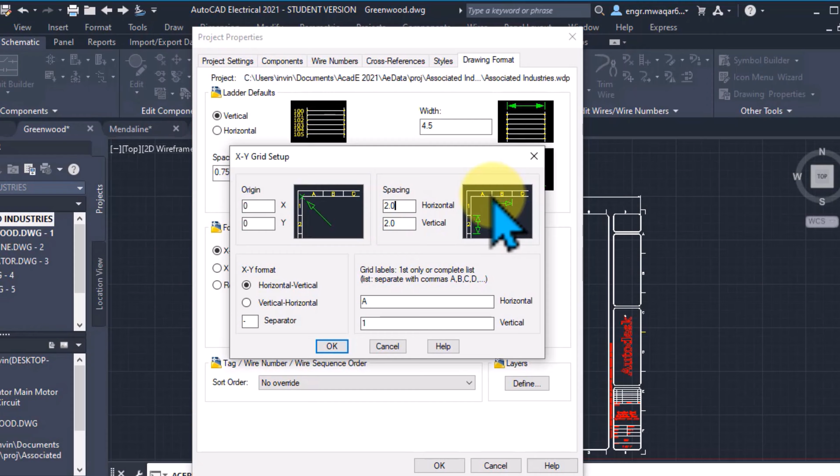It really is. Like if you need to tell someone how to find you, the absolute best you can do is point and say, hey, meet me at the gray house next to the other gray house, like 3 doors down from the gray house on the corner. Which means, practically speaking, you just cease to exist on the map. I mean, you are entirely unfindable. Unfindable, yes. And that nightmare scenario isn't science fiction. It is a very real, everyday possibility in the world of industrial design.

Oh, absolutely. Because that feeling of being totally lost in an endless sea of identical pathways, that is exactly what you get when you look at a really complex electrical schematic that lacks a rigorous automated numbering system. Yeah, because drawing a bunch of lines that connect a bunch of symbols, well, that doesn't give you a blueprint. No. It gives you a bowl of digital spaghetti. Right. It remains pure geometry on a screen, like just lines and arcs. Exactly. It has no internal logic, no syntax, and zero real-world utility for the actual technician who eventually has to wire the physical machine. Right.

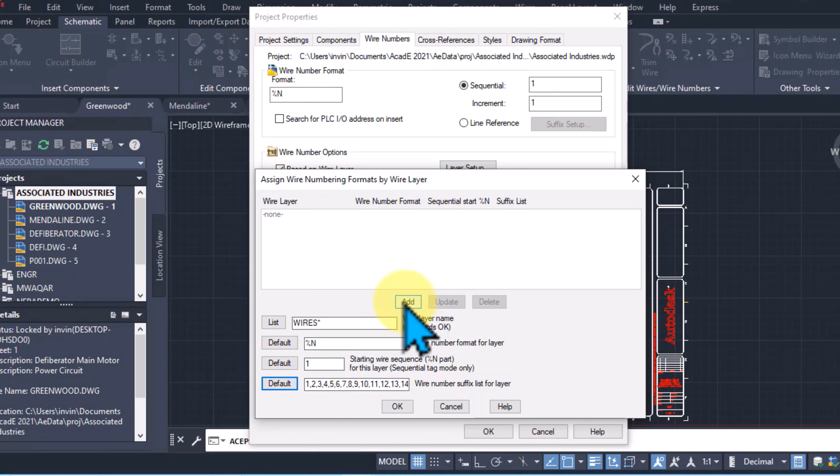And that transition from meaningless geometry to a highly structured, intelligent system, that is the entire focus of our deep dive today. Yeah, and we've got some really interesting material for this one. We do. We are pulling apart a very specific, highly technical set of sources. We have the transcripts from 5 incredibly granular YouTube tutorial videos. These are produced by Suntech Engineering Solutions. Right, and specifically, these cover sections A through E of their curriculum on wire numbering within AutoCAD Electrical.

Listening to this, maybe on your commute or while cooking dinner, you might be wondering, why on earth are we dissecting AutoCAD tutorial transcripts? It sounds a bit dry on the surface. Right, but we aren't here to read a software manual to you. We're not going to tell you which drop-down menus to click. No, definitely not. Our mission here is to extract the underlying philosophy from these sources, because we are looking at systems thinking, the mechanics of data automation and, honestly, the psychology of error troubleshooting. Yeah. The software here is merely the vehicle.

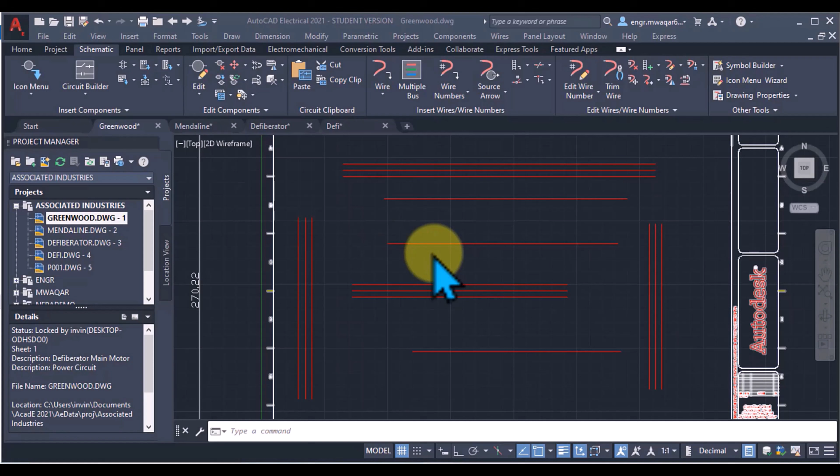What these tutorials reveal, and often they do it inadvertently as they walk through these technical keystrokes, is really a masterclass in how establishing incredibly rigid rules at the micro level is crucial. Like at the scale of a single copper wire. Exactly. Because controlling that micro level is the only defense you have against just catastrophic failure at the macro level of a massive engineering project. So before we can start naming the avenues in our hypothetical gray city, we have to understand what kinds of street signs we're even legally allowed to print. Right. What are the rules of the road?

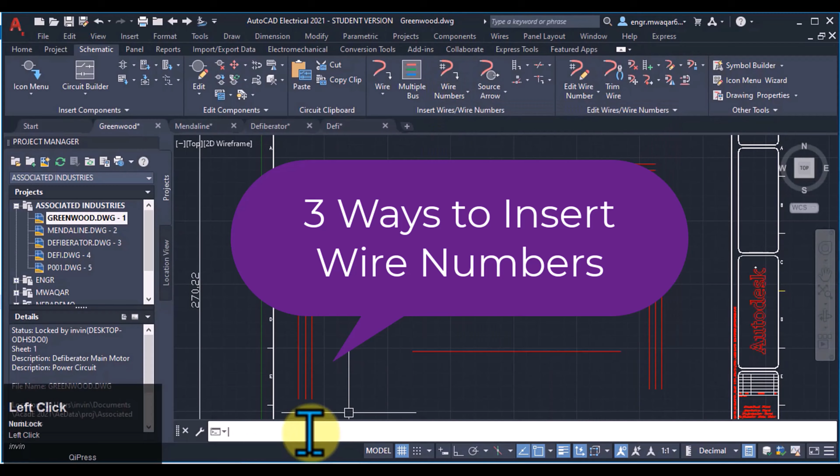Exactly. The system gives us a very specific taxonomy of tools. So the Suntech sources kick off by defining 4 primary types of wire numbers you can deploy. They are normal, fixed, extra, and signal or terminal based. And that right there immediately establishes a hierarchy of control. You aren't just slapping text onto a line. Yeah. You are assigning a behavioral category to that specific data point. Let's isolate those first 2, because the contrast between normal and fixed numbers really sets up the entire philosophy of this software. Which is the core tension.

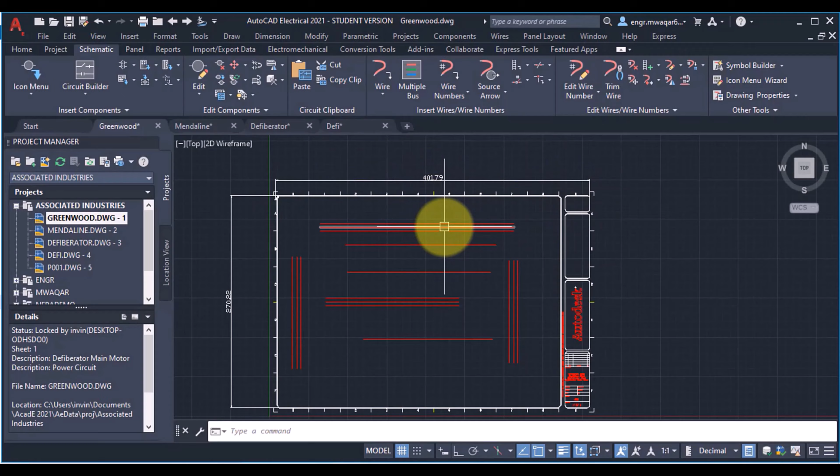Yeah. To use a physical analogy, a normal wire number acts like an incredibly smart digital sticky note. It pays attention to its surroundings. Right. So if you redesign a circuit and move that wire to a completely different part of the schematic, the normal number recalculates its position. It essentially says, oh, I'm in a new zone now. I should update my value to reflect my new reality. Yeah, it is entirely responsive to the environmental logic of the drawing. It yields its identity to the broader system.

But the fixed number, on the other hand, operates under a totally different mandate. Oh, completely. The source explicitly notes that if you insert a number as fixed, it refuses to change, no matter what the automated system tries to do to it later. It is basically the equivalent of taking a permanent marker to the digital blueprint.

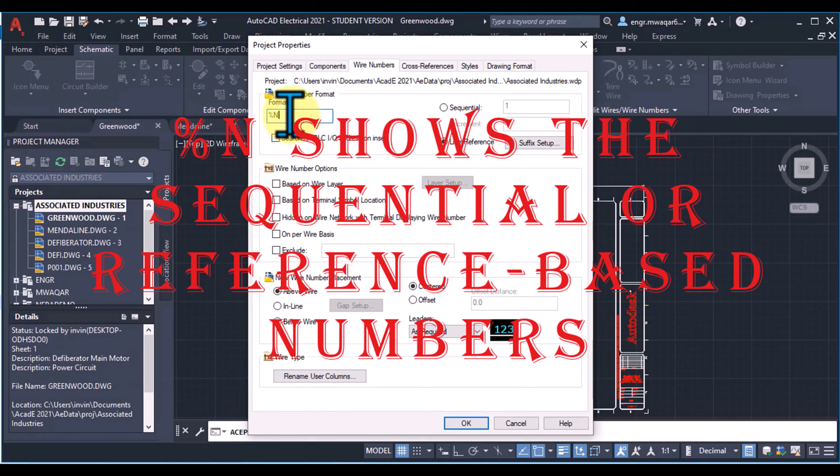Yeah. And to understand why you need that, think about the physical reality of what these schematics actually represent. Okay. You might be designing a control panel for a massive municipal water treatment plant. Right. Sure. Lots of moving parts. Thousands of dynamic changing variables. But there are also absolute constants.

Like what? Well, you might have a specific main power relay that is hard-coded into the physical architecture of the facility. It has been wire 100 for 20 years, and it will be wire 100 for the next 20 years. I see. So even if I add a dozen new circuits upstream of it, and the software's sequential counter really wants to renumber that old relay to, say, wire 112, the fixed designation just throws up a wall. Exactly. It's the manual override. It's the human engineer planting a flag and basically telling the algorithm, do not touch this.

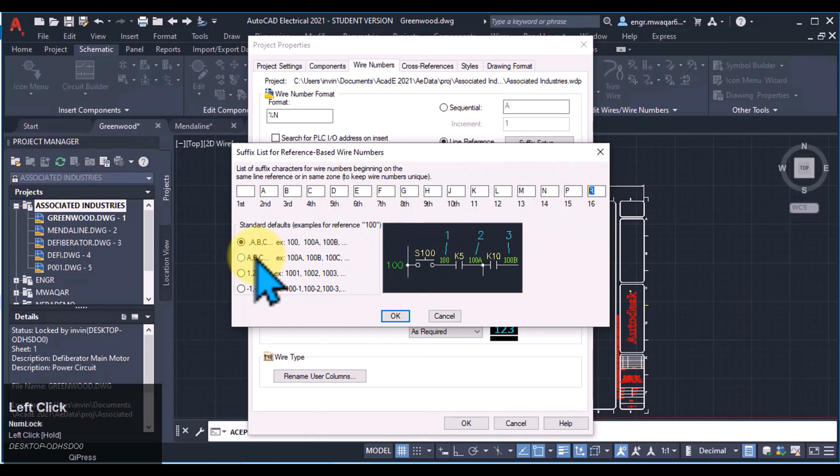And that tension between the normal dynamic automation and the fixed static anchor, that is the central tension of all complex systems. You have to decide where to yield control to the machine and where you must maintain absolute human authority. That makes total sense. Now, beyond just normal and fixed, the system gives us extra wire numbers. The sources briefly touch on these as auxiliary labels you might need for secondary referencing. Right, just handy extra tags.

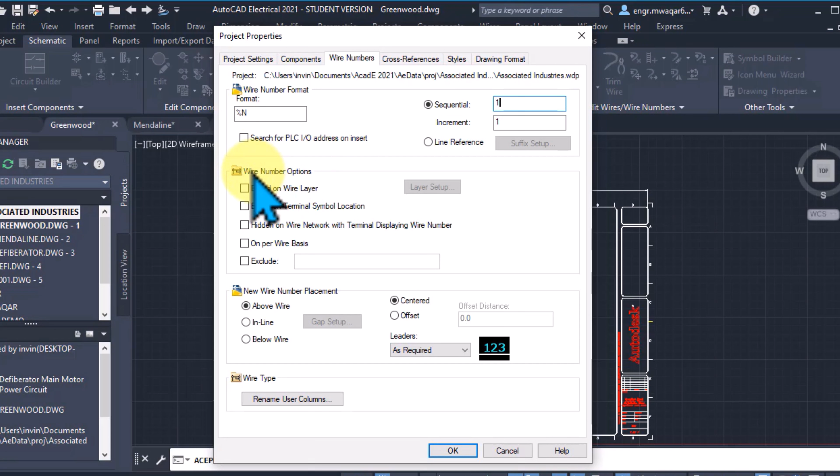Yeah. And then there's signal or terminal-based numbers, which actually tie the identity of the wire to the physical connection block it terminates at. Which is a beautiful preview of how the software tries to map the digital lines to physical hardware. We'll actually see that principle explode when we look at the insertion basis options in a minute.

But before we get there, the user has to define their processing scope. The system essentially asks, how wide of a net are we casting here? Right, the scope of the command. You can process the current drawing, you can go project-wide, or you can surgically select individual wires. So the micro, the meso, and the macro scopes of operation. Exactly. As for actually inserting these numbers, the tutorials detail the mechanics. You can use the ribbon tab UI, or you can manually type the command AEWIRENO into the prompt.

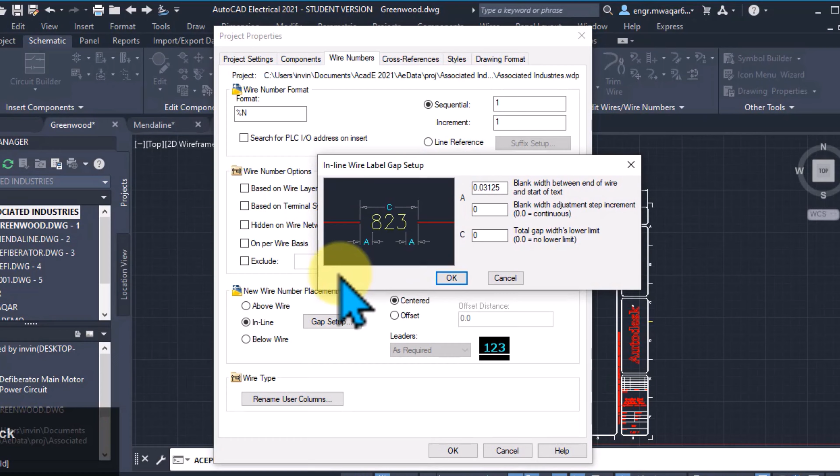But the mechanical input isn't the fascinating part. Not at all. The fascinating part is how the software knows what to name the wire. The sources list 3 main basis options for generating that identity. And this is where we really shift from the behavior of the label to the origin of the data itself. First, you can base it on local drawing properties, meaning the wire just follows whatever sequential or grid-based rules are set up for that specific document. Okay. Second, for 3-phase circuits, you can base the numbering on specific prefixes and suffixes.

Let's actually pause on the 3-phase circuits for a second. Sure. In industrial power, 3-phase electricity uses 3 alternating currents that are slightly out of phase with each other. This is to deliver continuous massive power to heavy machinery. Okay. And physically, those are 3 distinct heavy gauge cables usually designated L1, L2, and L3. If you mix those up, a massive industrial motor could literally run backward or even rip itself apart. Oh, wow. That's terrifying.

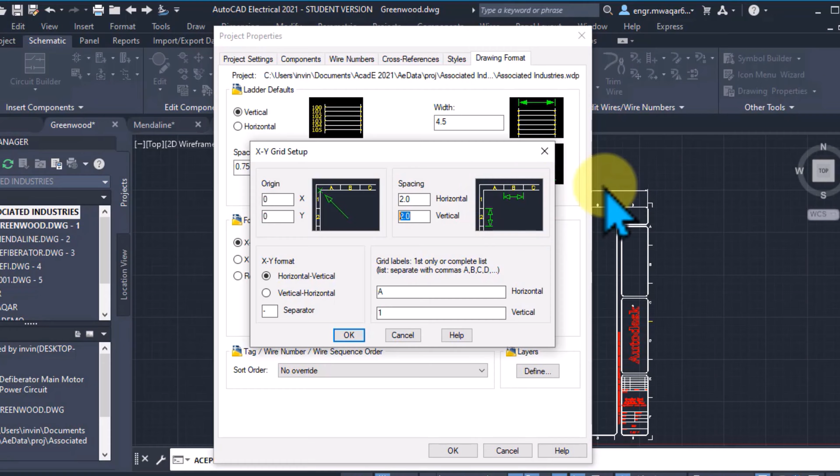So assigning a numbering basis specifically tailored to append those L1, L2, L3 suffixes automatically, well, that isn't just a neat formatting trick. No, it's a safety feature. Exactly. It is a safety-critical mapping of real-world physical phase alignment directly into the digital space. That makes the third basis option even more compelling. The source states you can base the numbering entirely on PLC I/O. Right. For anyone outside the automation space, that stands for Programmable Logic Controller Input-Output Addresses. And this is arguably the most powerful conceptual leap in the software.

I have to admit, I found myself struggling with this one initially. Really? How come? Well, if a copper wire is just a copper wire, why does it matter if it happens to connect to a PLC? Like, why does it need an entirely distinct algorithmic category for its numbering? That's a fair question. Why not just number it sequentially like every other wire on the board?

To understand that, we really have to look at what a PLC actually is. A programmable logic controller is not just another dumb component sitting on a rail. Okay. It is the centralized computational brain of the machine. It is the ruggedized industrial computer that reads the sensor data and makes the split-second decisions to fire a pneumatic piston or halt a conveyor belt.

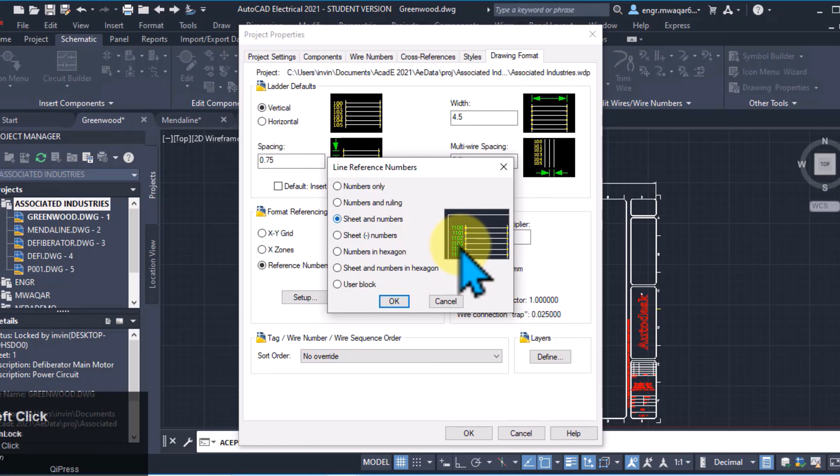So it's the nerve center. Yes, exactly. And that nerve center interacts with the world through very specific physical ports, its inputs and its outputs. Inside the computer's memory, those physical ports have hard-coded addresses. Like an IP address, sort of? Kind of, yeah. Let's say input port X17 is the physical port monitoring an emergency stop button.

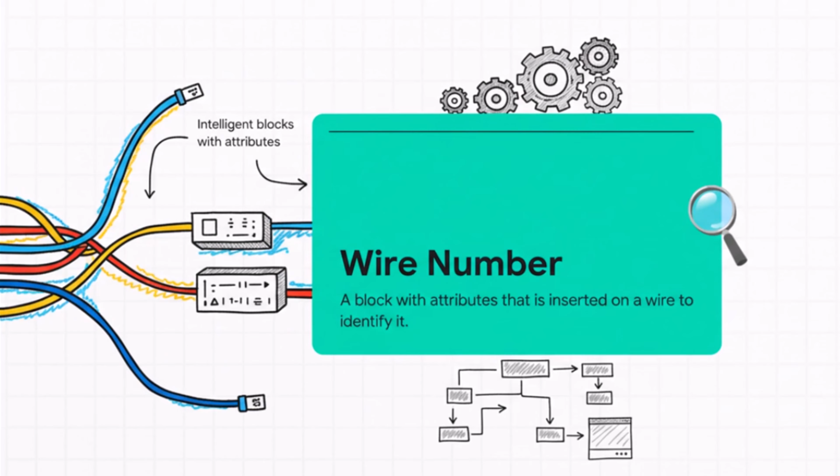Important button. Very. Now, if you just use sequential numbering and call the wire connecting to it wire 42, you force the human technician to act as a translation layer. Right. The technician looks at wire 42, has to go consult a completely separate spreadsheet to see that wire 42 maps to port X17, and then wires it up. And every time you force a human to cross-reference 2 different documents, you introduce a massive vector for error.

Exactly. But if you base the wire number on the PLC I/O address, the software intelligently scans the schematic. It traces the digital line back to the PLC symbol, reads the port name X17, and automatically forces the wire to adopt that exact name. Oh, I see. The wire fundamentally loses its independent identity as just another line, and it becomes an explicit named extension of the computer's logic.

The wire becomes a data bridge. The physical copper literally takes on the digital address of the brain it feeds. Exactly. It collapses the theoretical map and the physical hardware into a single unified language. That is brilliant. Now, if you aren't tied to a PLC and you were just using sequential counting, the rules for how the software handles incrementing are brilliantly literal.

Yeah, they really are. The tutorials point out that your sequential numbers can be numeric, alphabetic, or alphanumeric, and the system recognizes the patterns differently. If you format a wire as A101, the software recognizes the alphanumeric structure, and it increments the numeric portion for the next wire, giving you A102. Right. It parses the string, identifies the integer, and just runs the math. But if you just give it a simple letter A, the software defaults to an alphabetical sequence. The next wires become B, C, D.

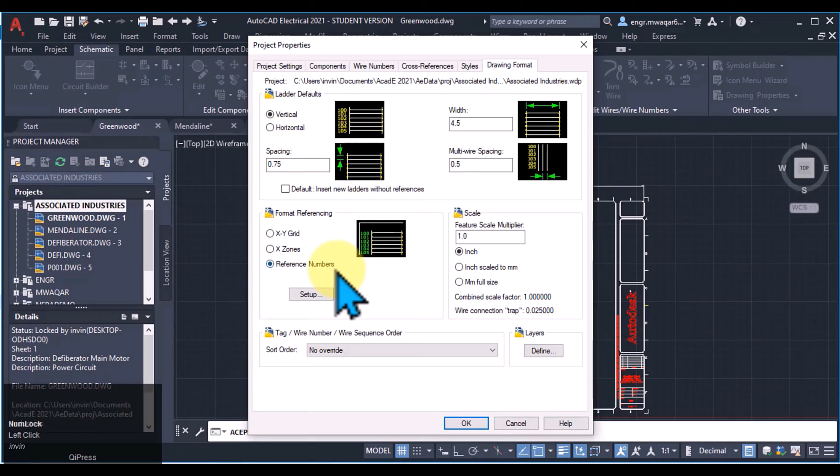Makes sense. You also have suffix setups where you can append sequences to the end of a base format. The source notes you can have suffixes of 1, 2, 3, or ABC. But what really caught my eye was the mention that you can use negative numbers as suffixes. Oh, yeah, which opens up a whole secondary layer of information encoding.

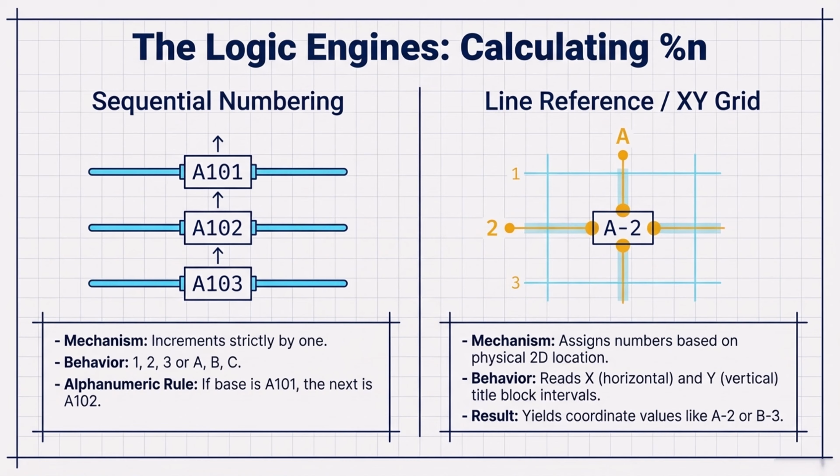How so? Well, in complex DC circuitry or systems dealing with specific signal polarities, the return path or the negative leg of a circuit is just as critical as the positive. Right. By allowing a negative suffix natively in the automated sequence, the engineer can encode the literal direction of current flow or polarity state directly into the automated naming convention.

So we have defined our toolkit. We have responsive sticky notes, stubborn permanent markers, phase-aware tags, and PLC-driven data bridges. It's a robust toolkit. It is, but having the tools is only the preliminary step. I mean, if you hand someone a dictionary, it doesn't mean they know how to write a coherent sentence. No, definitely not. We have to look at the syntax. We have to look at the rigid grammatical rules the software enforces to prevent the user from generating absolute gibberish.

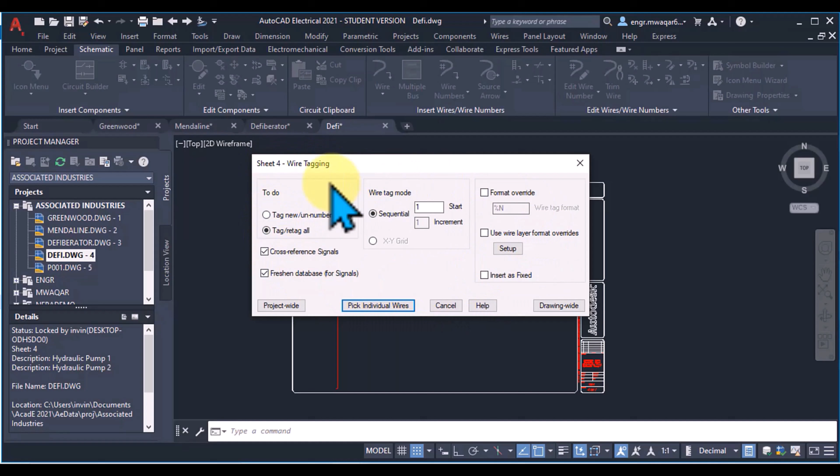And whenever a system handles automated naming across thousands of variables, the syntax is really the only thing standing between order and chaos. The sources take us deep into the project properties dialog box, specifically into the tab governing wire numbers in drawing format. Right. And there is a mandate here that the tutorials hammer home with intense focus.

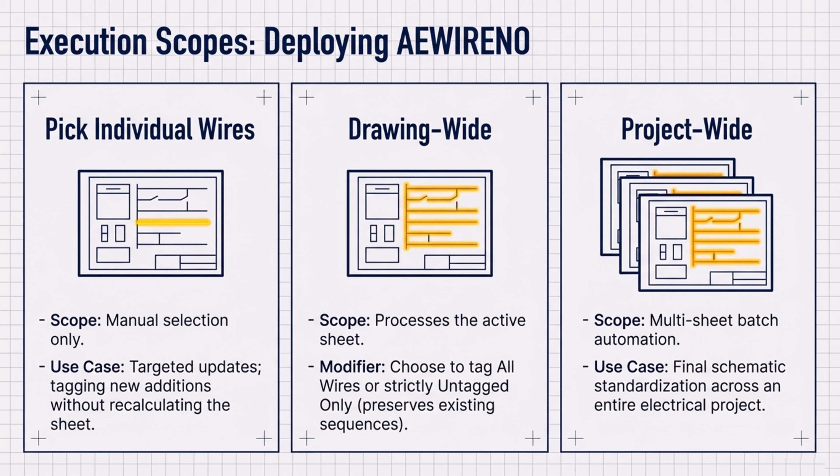The software uses the % sign to denote variables, and the source makes it unequivocally clear that the %n variable, which represents the sequential or reference-based base number, is absolutely mandatory. Yeah, you cannot skip it. It must be included in your format block. It is a hard-coded architectural requirement.

And the instructor in the video actually demonstrates this by trying to break the rule. I love when they do that. It's so helpful. They go into the format box, delete the %n, and attempt to just use the %s variable, which stands for the sheet value.

Okay. They try to apply it, and the software immediately throws up a brick wall. It generates an error message that reads, "Wire format cannot be used as is. Valid formats are %n base wire number." That is a textbook example of forcing function in software design.

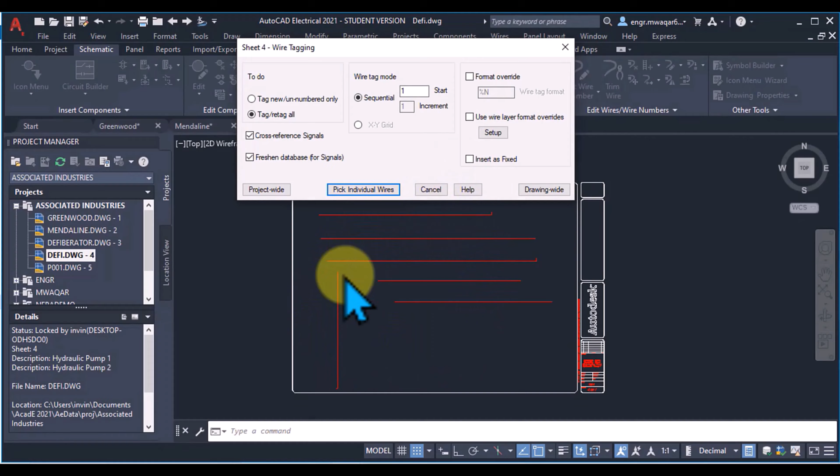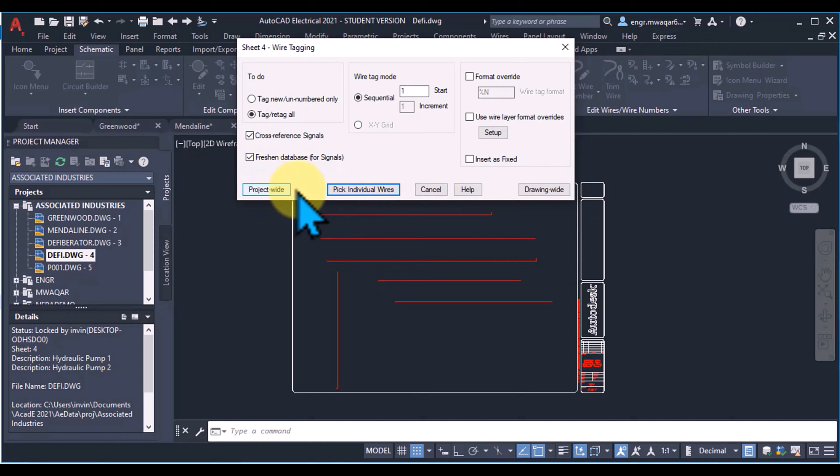The system evaluates the user's input, anticipates the inevitable downstream failure, and completely revokes the user's ability to execute the command. So let me advocate for the frustrated new user here. Go for it. If I am an engineer and I'm just trying to draft a straightforward control circuit, why do I need to learn this arcane language of %n and %s? Right. Why can't I just click on the digital line, open a text box, and manually type in wire 1? Why does the software force me to essentially write code just to name a line?

It is a very natural friction point. When you are operating on a small scale, manual entry always feels more intuitive. If you are drawing a circuit with, say, 12 wires, you can hold the state of that entire system in your working memory. Sure. You know, you just typed wire 7, so the next one has to be wire 8. The human brain can manage a dozen variables easily. Exactly. But industrial CAD software is not built for a dozen variables.

It is built to design the electrical architecture of a commercial airliner, or an automated automotive assembly line, or an offshore drilling rig. Oh, wow. Okay. In those environments, you are dealing with 50,000 unique wires spanning 400 pages of schematics, being actively edited by 30 different engineers simultaneously on a shared server. That scale is terrifying. It is. At that scale, if the software allows you to just click and type wire 1, the entire project is doomed before lunch.

How so? Well, engineer A in Detroit types wire 1 on page 14. Engineer B in Stuttgart types wire 1 on page 200. The local logic makes sense to them individually, but the global system now has a fatal collision, because there are two wire ones. Yes. And when the physical machine is being built on the factory floor, a technician might take a high-voltage power line meant for a hydraulic pump and terminate it into a sensitive, low-voltage data sensor because both lines share a manually typed duplicate identifier. And boom. Boom! The resulting short circuit could cause millions of dollars in damage. Or worse.

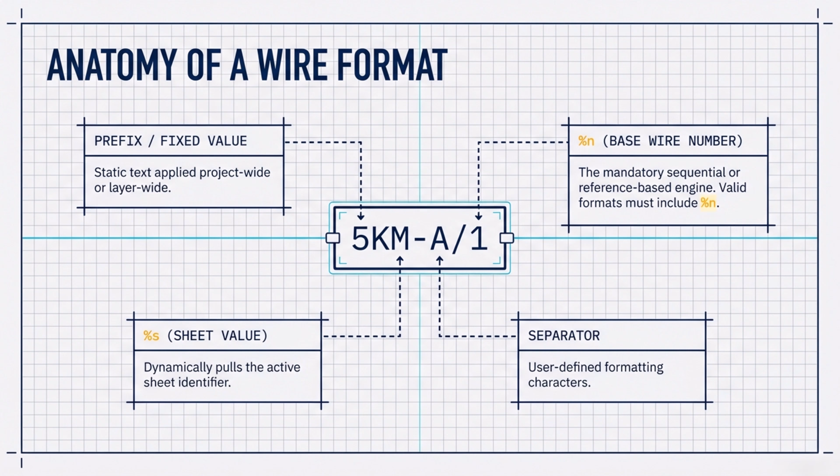So the %n variable isn't just a quirky formatting requirement. It is the heartbeat of sequential integrity. By forcing you to use %n, the software is stripping away your ability to manually track the count. Exactly. You are surrendering the counting process to a centralized, infallible database. Right. You tell the software, I don't know what the current global count is, and frankly, I shouldn't have to care. You query the database, find the next available unique integer, and inject it exactly where this %n sits in my formula. The software simply refuses to let you build a system that relies on flawed human memory.

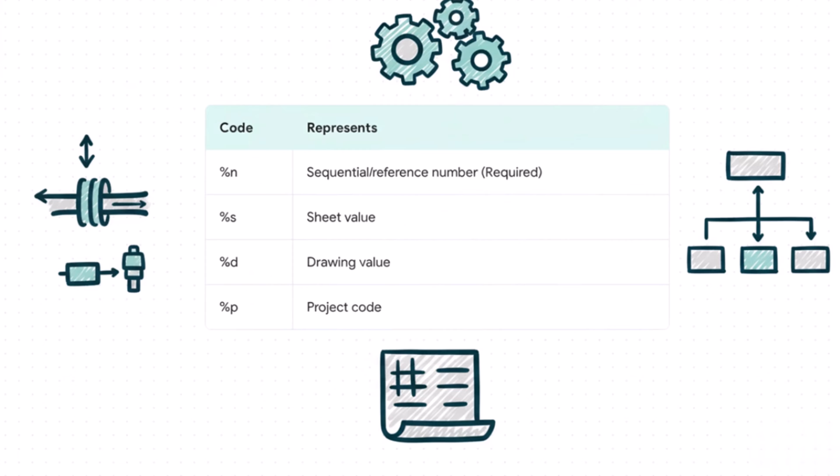That is profound. Once you accept that the %n is mandatory for survival, the sources show you the rest of the variable library you can play with. It's quite extensive. You can stack these variables to build incredibly dense packets of information. You can add the %s for the sheet value, so the wire intrinsically knows what page of the blueprint it belongs to. Which is vital. You can pull in variables for the drawing value, the overarching project code, the installation code, the specific location code within the physical plant, and even the section and subsection of the machine. You are essentially constructing a highly compressed, custom digital zip code for every single component.

And the tutorial shows how you can encapsulate all this automated data with formatting flourishes. Right, to make it readable. Exactly. You don't have to output a raw string of meaningless text. You can enclose the automated numbers inside square brackets to make them visually pop off the dense geometry of the page. You can hard code fixed prefixes and suffixes directly into the syntax around the variables. The visual parsing of this data is so important. The source gives a great specific example of this.

They set up a format that outputs wire names like 5KM1 and 5KM2. The 5KM is a fixed prefix typed by the user, and the 1 and 2 are generated by the automated %n sequence. They also show appending suffixes like PS1 and PS2. Think about the technician standing in front of a cabinet containing 3,000 identical gray wires. Right, our gray city. If every wire is just a random string of numbers, troubleshooting requires constantly looking back at a massive index. Which takes forever.

But if they see a wire labeled 5K14PS2, and they know that the 5K prefix designates the primary cooling loop, and PS designates a pressure switch, well, they instantly understand the function, origin, and destination of that wire without ever opening a manual. The syntax does the heavy lifting.

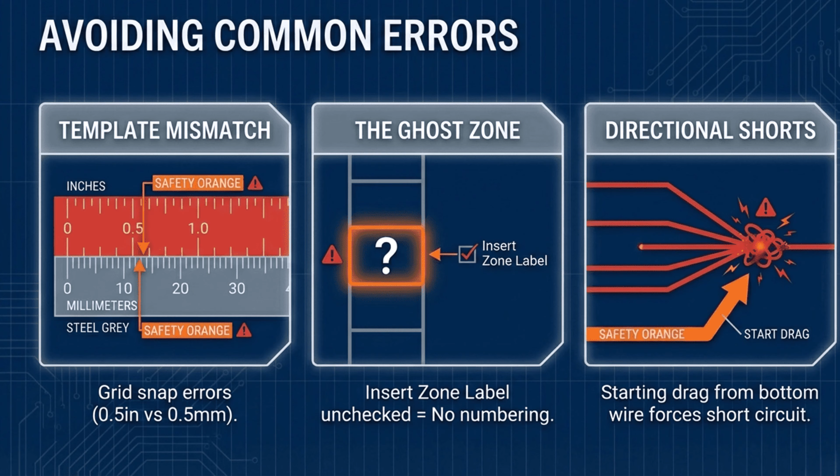The software extends this level of granular control right down to the physical placement of the text ink on the digital page. Oh, the wire layer configuration. Yes, the sources dive into that. You can instruct the system to automate the numbering based entirely on which specific default wire layer you happen to be drawing on. Which is super clever.

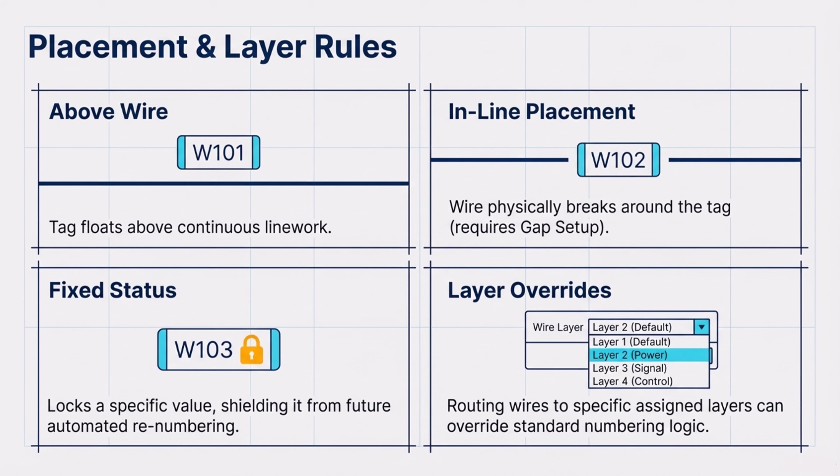And you can dictate the geometry of the text itself, right? You can tell the software, I want all wire numbers to hover exactly 2 millimeters above the wire. Or I want them placed directly in line, visually breaking the line segment. Or I want them offset by a very specific coordinate distance. Which is an absolute necessity for legibility. You can design the most brilliant, data-rich naming syntax in the world, but if the software just dumps that text directly on top of a cluster of intersection symbols, it becomes an unreadable black smudge on the printed blueprint.

Okay, so we've defined our tools. We've written our airtight %n-driven syntax. We have a perfectly formatted label that contains the sheet number, the subsystem prefix, and a unique sequential integer. Sounds perfect. But none of that matters if we don't know where to put it. Right. This brings us to the geometry of order. The software has to understand the physical space of the blank page. The theoretical data has to be mapped to geographic coordinates.

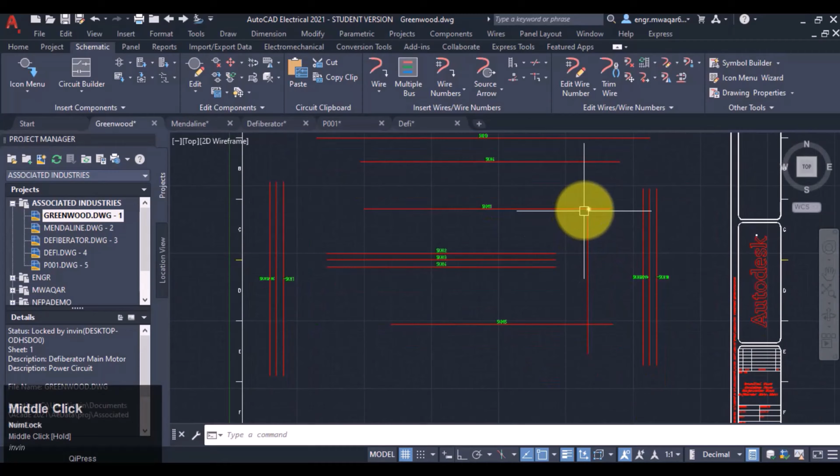Yes. The software derives its numbering logic directly from the physical geometry of the drawing page. And it all revolves around the concept of the title block. Right. We all know how standard engineering title blocks work. They frame the drawing with a grid. You typically have horizontal axes along the top and bottom with numerals, say 1 through 10, and vertical axes along the sides with alphabetic characters, A through F.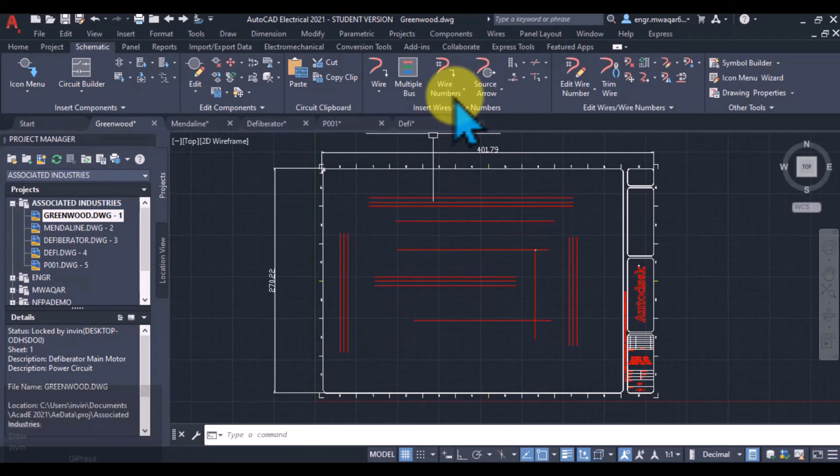But the crucial realization here is that AutoCAD does not intrinsically possess visual intelligence. It doesn't see the letters and numbers drawn in the margins of your template. To the software, those are just dumb, dead pixels. You have to mathematically map those axes for the software. You have to calibrate the engine. And the deep dive into the math required to do this is genuinely fascinating. Walk us through it.

So the source walks through the exact calculation. The instructor says, look at your horizontal x-axis, count the total number of sections. If your grid starts at 0 and goes to 9, you have 10 discrete sections. Okay, a simple integer count. But then you have to find the total physical absolute distance of that entire axis within the digital coordinate system. Right. You measure from the 0 line all the way to the 9 line. And you take that overall distance and divide it by your 10 sections. The instructor does this live on screen, and the calculation outputs a very specific, highly granular value, 40.179.

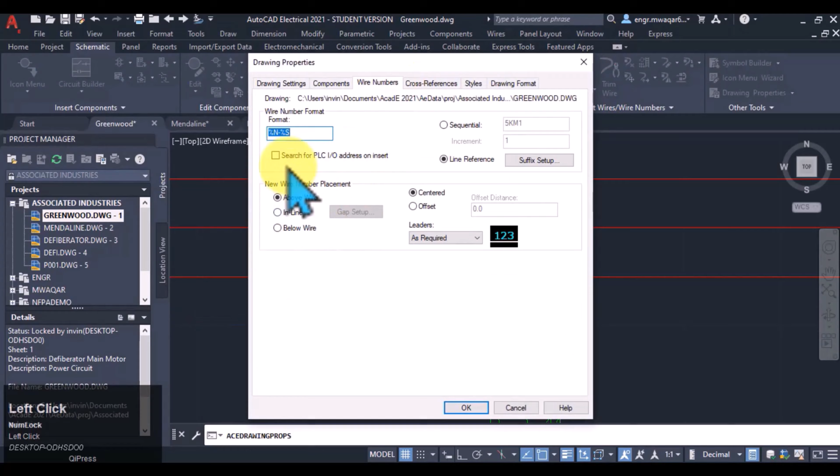That number is the Rosetta Stone for the drawing's geometry. Let's really unpack what 40.179 means. It's not an arbitrary software setting. It represents the exact physical distance of one single grid spacing on that specific file. Right. You perform the exact same measurement and division for the vertical y-axis to find the precise distance between the letter A and the letter B. And the system requires that distance calculated down to the thousandth of a decimal point because it is going to use those values to dynamically build an invisible matrix across the entire drawing space.

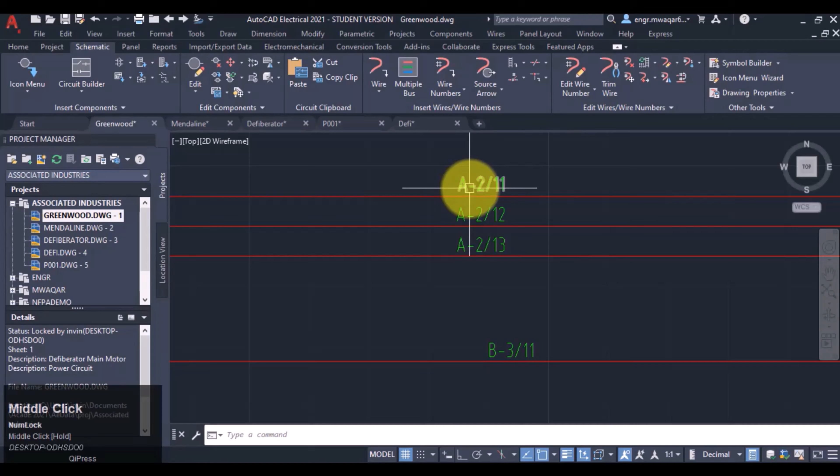And this mathematical mapping unlocks what the source calls XY format referencing. This is where it gets really good. When you activate this, the %n sequence isn't just a dumb counter anymore. It actually pulls the horizontal and vertical coordinates of where the wire was drawn and combines them to generate the name. The wire fundamentally becomes its location. It becomes B2 or D7. It is the exact mechanic of playing the board game Battleship. Yes. The wire isn't arbitrarily called wire 400. It is a wire that was literally birthed at coordinates C4. The geography dictates the identity.

Consider the real-world application of this. You have a technician responding to an error code on a factory floor at 3 a.m. The diagnostic interface throws a fault for a specific sensor wire. If the schematic relies purely on sequential counting and the system says fault on wire 8,432, the technician unrolls a massive D-size blueprint and has to visually scan a sea of thousands of identical tiny lines.

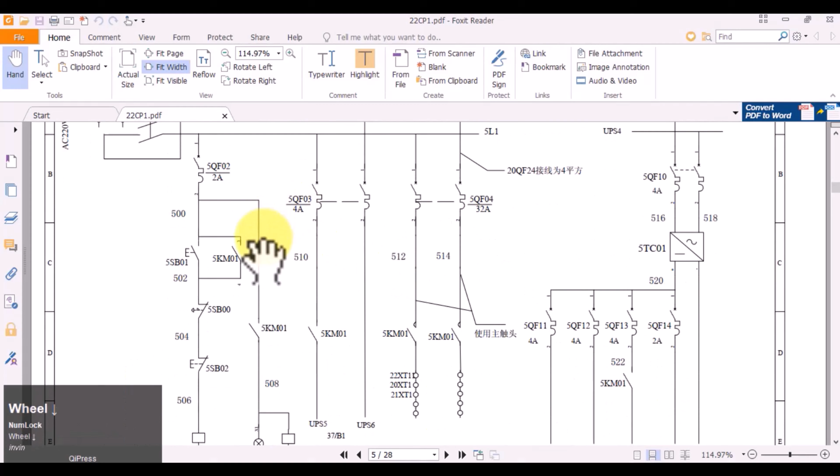It's like playing Where's Waldo. Exactly, just playing Where's Waldo until they stumble across the number 8,432. It's an agonizing waste of time during a critical outage. But if the engineering team utilized the XY format based on that precise 40.179 grid mapping, the diagnostic system says

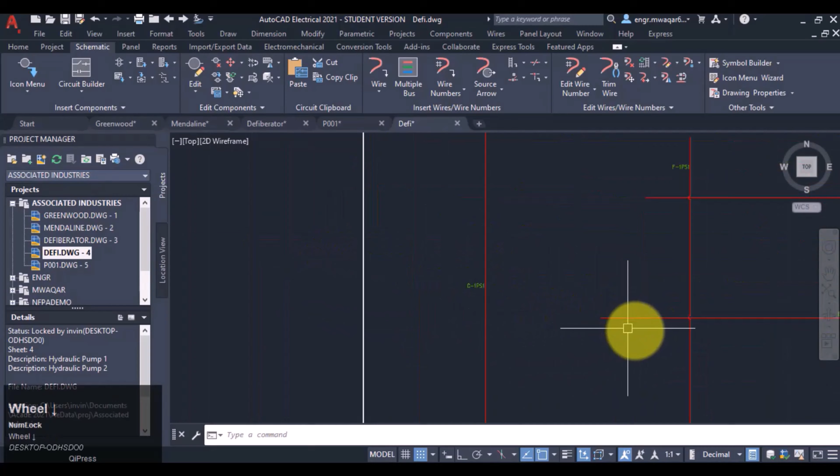fault on wire D7. The technician looks at the margin of the paper, finds the letter D, looks at the top margin, finds the number 7, traces their fingers to the intersection, and the faulty wire is isolated within a 2-inch square quadrant instantly. Weaponizing the physical geography of the paper saves thousands of hours of maintenance downtime.

Absolutely. The sources also detail a variation called X-zone referencing. In this setup, the vertical axis is ignored completely. The numbering is driven purely by the horizontal zone placement. If a wire drops down anywhere in vertical column 2, it gets assigned a 2. If it drops in column 5, it gets a 5. Which is the industry standard for ladder-style logic diagrams.

Right. In ladder logic, the power rails run vertically down the sides, and the control circuits run horizontally across, like the rungs of a ladder. The horizontal X-zone is all that matters for tracking the sequence of operations. The bedrock of all this geometry is what the sources call the feature scale multiplier. Oh, this is a big one.

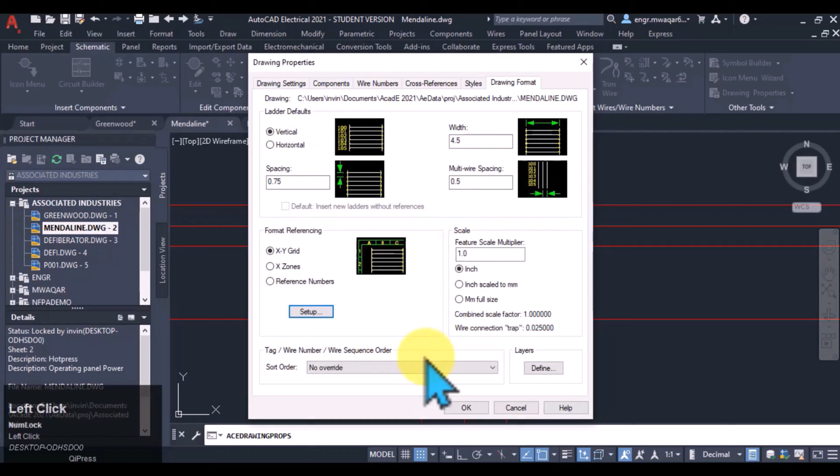This is the foundational setting where you declare whether your drawing space operates in inches or millimeters. It seems like an afterthought, but it is the single most destructive variable if set incorrectly. Really? Think about it. If you calculate your grid math expecting a 40-inch span, but the overarching file logic is interpreting those 40 units as millimeters, your invisible mapping matrix shrinks to a fraction of its intended size. Oh, I see. All the dynamic XY numbering will instantly corrupt.

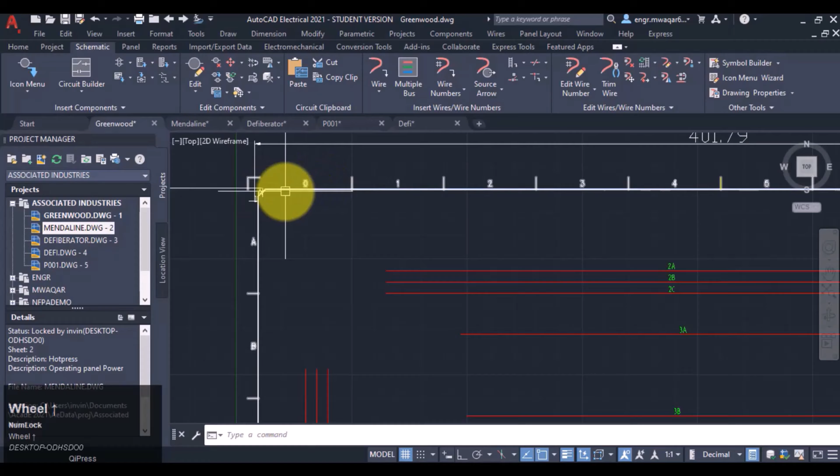So we've established our tools. We've coded our airtight syntax. We've successfully mapped our invisible geometric matrix using our precise 40.179 spacing. We are ready to execute. We are. But reality, as anyone who has ever touched software knows, is incredibly messy. Perfect systems rarely survive contact with human users. Very true. So we have to talk about troubleshooting the chaos.

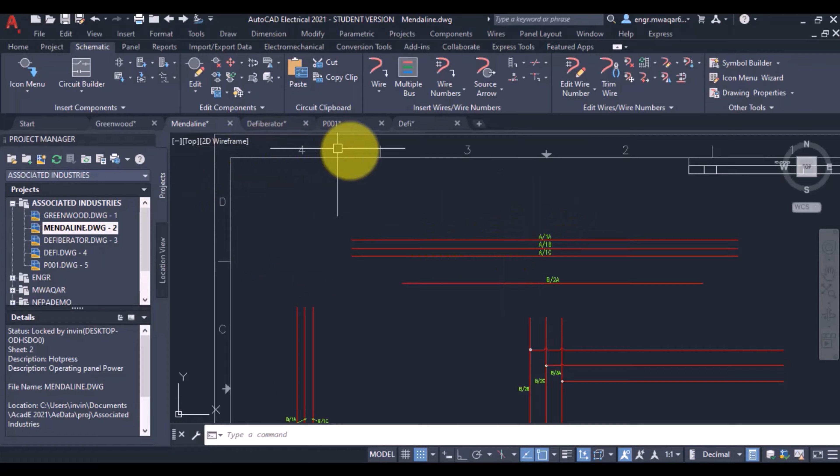Yeah. Because when you build a system this rigid, what happens when it encounters an anomaly it cannot process? It breaks. And how a system communicates its own failure is the true measure of its design. The tutorials provide some fantastic, highly specific examples of the system actively breaking down and the diagnostic paths to fix it. Yeah, these are great.

The first major error the instructor encounters is visceral. They open a drawing, apply their numbering format, and instead of seeing clean alphanumeric tags, the drawing is littered with question marks. A literal question mark symbol appears right in the middle of the wire tags. And seeing a question mark generated by automation usually induces immediate panic. It implies the data is corrupted.

But the instructor walks through exactly why the software does this. A question mark isn't a corruption. It's a deliberate communication. Right. It appears when AutoCAD is evaluating the syntax string you built, but it hits a variable that it cannot find the underlying data for. Okay.

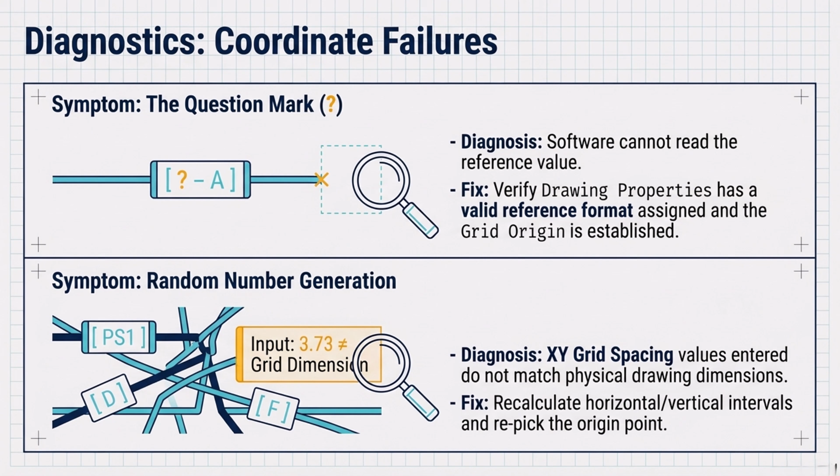In this specific video example, the user had built a format that required an external reference number. But in the component properties, they had simply forgotten to type the reference number in. It was a blank field. Oh. The software's logic engine gets to that empty field, stops, and outputs the question mark. This is a profound philosophical choice in software architecture. How so? Well, think about how it handles missing data.

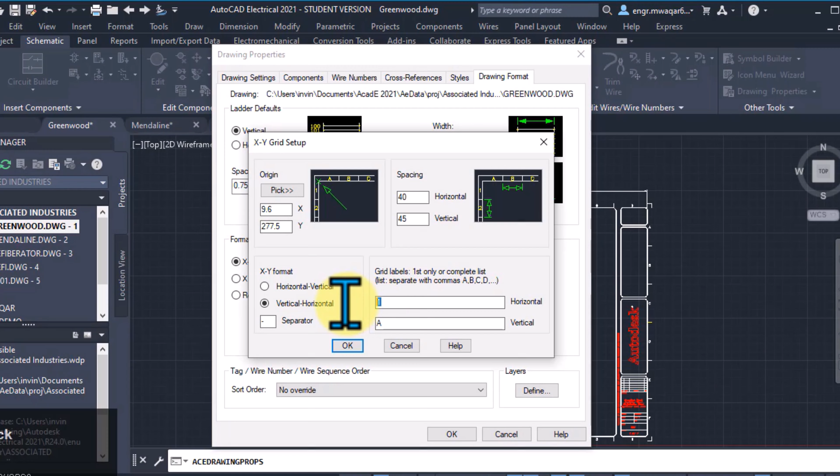A lazier, less sophisticated program might just silently drop the missing variable, concatenate the rest of the string, and print a half-complete label. It would pretend everything is fine. Which means you have a fundamentally flawed blueprint, but you don't realize it until the machine is built and fails testing. Exactly. A robust, automated system refuses to guess. It flags its own confusion loudly and immediately.

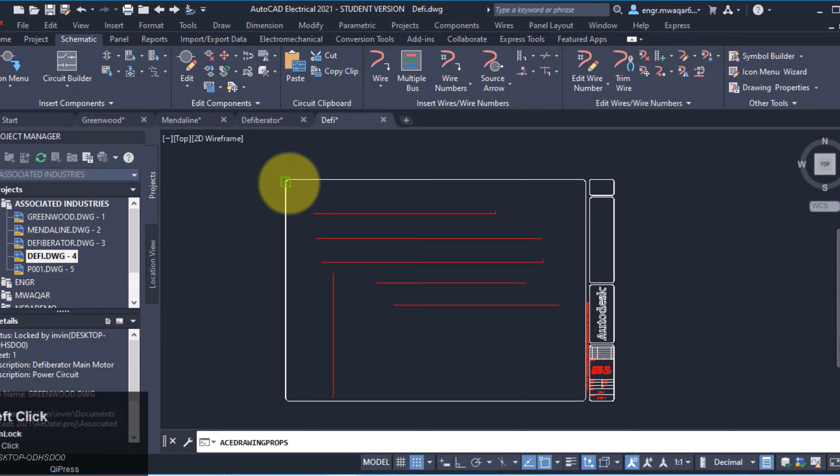It essentially screams at the user, "I lack the parameters to fulfill this command, and I will not proceed until you supply them." Wow. As an engineer, you should view that question mark as a gift. It is an immediate, visible flag of a missing data point. You can fix a question mark today. You cannot fix a silent omission until it causes a fire 6 months from now. The software is aggressively honest. Yes. Now, a more insidious issue the instructor tackles is what they dub the random numbers problem.

This one is confusing. They execute the wire numbering command, and the sequence goes completely haywire. Instead of wires labeled A, B, C, D in a neat vertical column, the drawing outputs D, then F, then E, then maybe a random J. The spatial logic is totally scrambled. And we know from our earlier discussion that sequential incrementing is tied directly to the invisible geometric matrix we built. So if the alphabet is scrambling, the geometry is fractured.

Right. The source reveals the two primary culprits for this geographic fracture. The first is simply inputting the wrong decimal values in that drawing property spacing menu we discussed. Okay, user error. But the second, much more fascinating cause is that the user forgot to anchor the drawing's origin point. The absolute 0,0 coordinate.

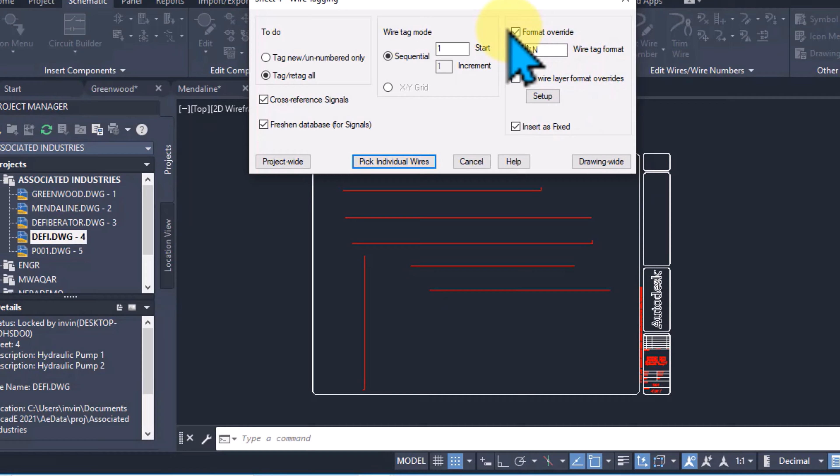Right. Think about using a navigation app on your phone. If you were standing in downtown Seattle, but your phone's internal GPS chip hasn't calibrated, and it thinks its zero-point origin is somewhere in the Pacific Ocean. Oh, man. The turn-by-turn directions it gives you are going to be completely psychotic. It will tell you to turn left into a skyscraper. The navigation algorithm itself isn't broken. It is executing its math perfectly, but it is applying that perfect math to a fundamental geographic lie.

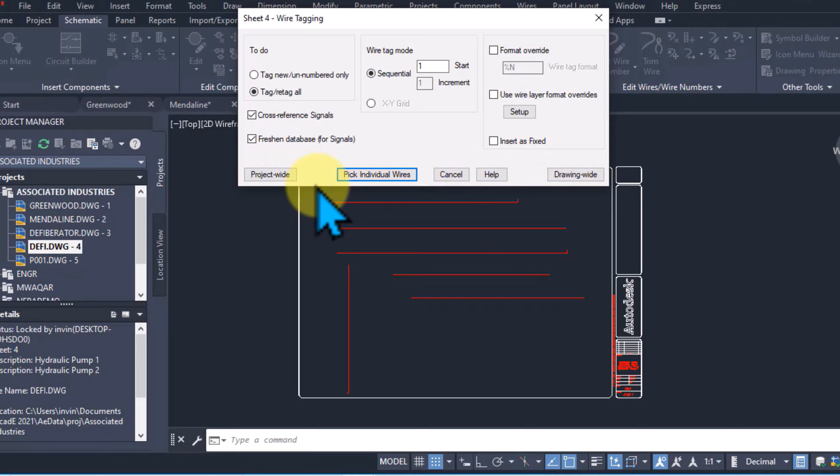And that is exactly what happens in the CAD environment. The software is calculating the physical bounds of Zone A based on where it thinks the bottom left corner of the paper is. Which could be anywhere. Exactly. If the origin point isn't locked to the actual visual template, Zone A might be calculated to exist entirely off the screen, and Zone F might be overlapping the center of the drawing. When it pulls the location of the wires, it outputs gibberish because the invisible grid and the visible drawing are completely out of phase.

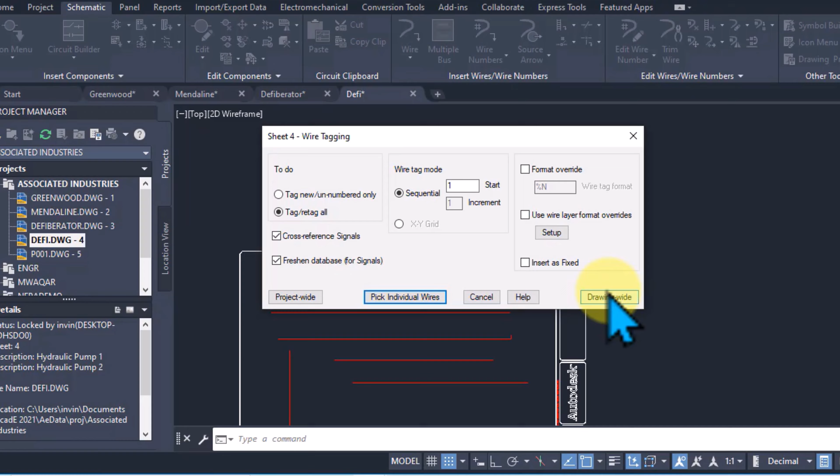To fix this phase misalignment, the instructor demonstrates a deep manual recalibration using a command called DLI, which stands for Dimension Linear. They basically take a digital tape measure and physically measure the skewed, warped grid lines currently on the screen. The software returns a raw distance value of 22.3958 units. The user knows they visually have 6 ladder rungs or 6 columns in that space. So they manually divide 22.3958 by 6, which gives them roughly 3.73. They are reverse engineering the broken geometry.

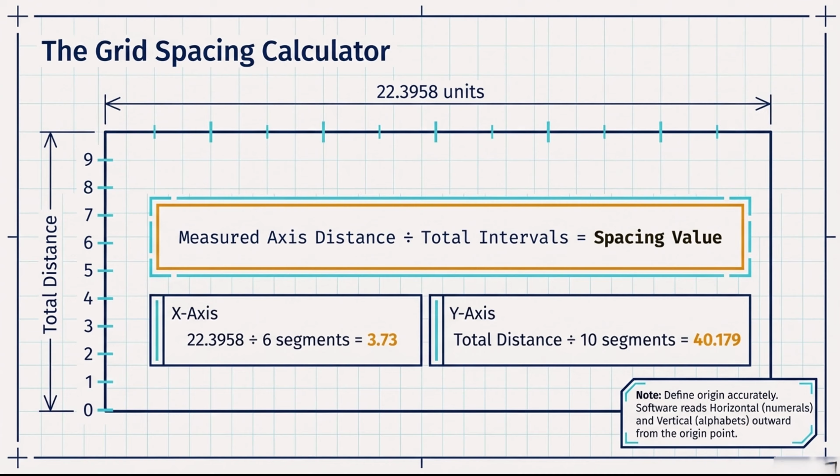Exactly. They then go deep into the configuration menus and manually force the software's internal math to match their visual reality, inputting 3.73 for the horizontal spacing and 40.179 for the vertical. They are performing open-heart surgery on the mathematics of the digital paper. Yes, forcing the algorithmic grid to snap back into alignment with the visual drawn grid. It highlights the ultimate responsibility of the human operator. The automation only works if the human maintains the integrity of the underlying math.

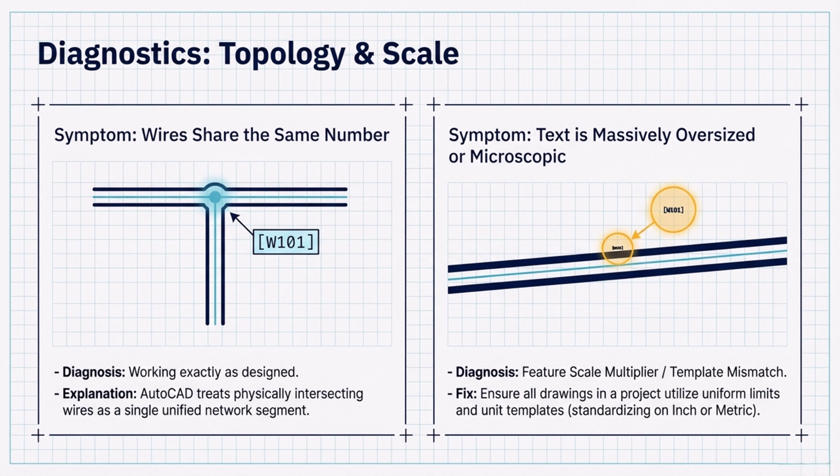The source also drops a brief mention of a physical anomaly that occurs during drafting. If you draw two separate lines and those lines cross and physically touch each other in the digital workspace, the software stops treating them as two separate entities. Oh, this is important. When you run the numbering command, it automatically assigns both lines a single identical wire number. That is not a glitch. That is a simulation of reality. We need to explore the massive implications of that in our final thoughts, because it changes how we view the software itself. We will absolutely bring that home in a minute.

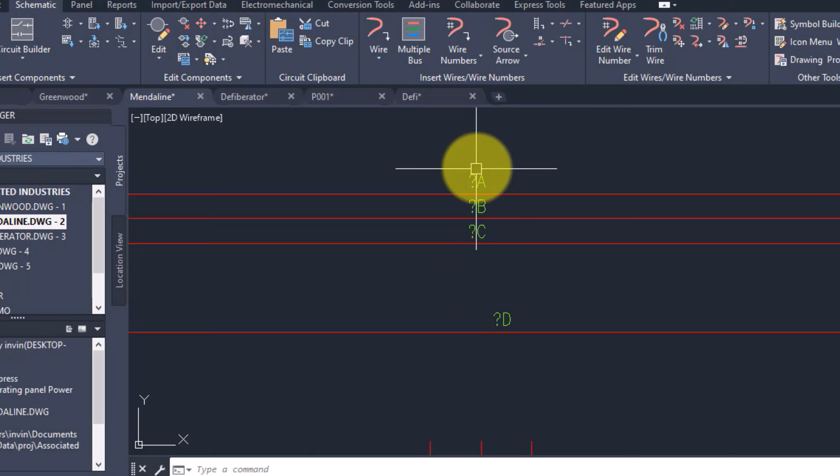But to wrap up the troubleshooting toolkit, the source covers the nuclear option. Sometimes you need it. When the origin point is lost, the grid is shattered, the text is skewed, and the drawing is covered in question marks, you don't have to meticulously untangle the knot line by line. You use the command AE erase wire number. The purge command. Yes. You select the entire drawing, execute the command, and it systematically hunts down and deletes every single piece of automated wire data on the page. It wipes the slate completely clean.

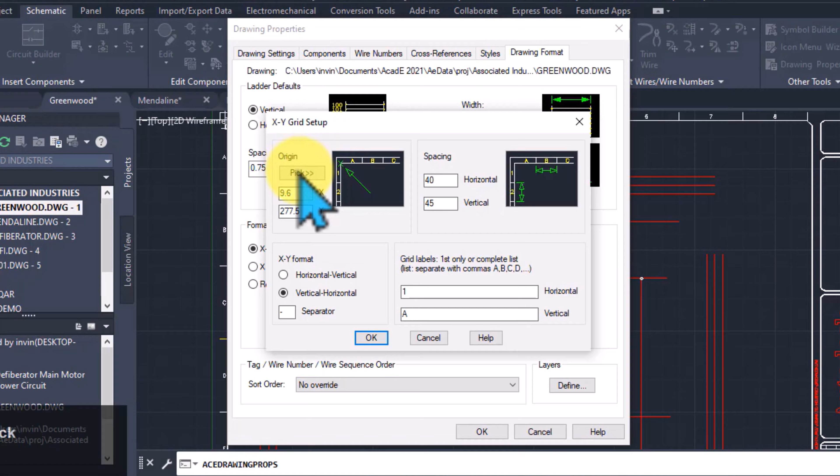Watching it happen in the tutorial is genuinely cathartic. Sometimes the fastest way to fix a corrupted system is to bring it down to the studs and reapply the rules from scratch. A clean foundation is always better than a patched-together mess. Always. Which brings us to the final, most complex phase of our journey. The macro view. Yes. We have mastered the single document. We know our grammar, our grid math, and our error codes. We have one flawless, perfectly numbered blueprint. But large-scale engineering requires hundreds of interconnected blueprints.

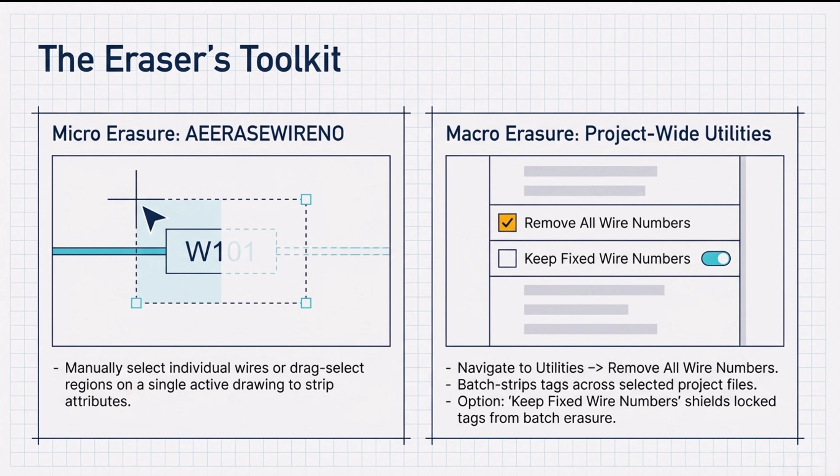Scaling up to the macro view introduces a whole new layer of potential chaos. How do we govern a system of systems? Right. When you move from a single file to a project folder containing dozens of files, you have to establish a hierarchy of rules. How much autonomy does an individual drawing retain when subjected to a project-wide command?

The source material focuses on project-wide numbering, where you unleash your algorithmic rules across an entire suite of drawings simultaneously. In the tutorial's case study, they're working with a master project containing 5 discrete drawing files. Okay. The software presents the user with 2 vastly different philosophical approaches to processing them. 2 models of governance, really. Option 1 is called sequential first tag, defined for each drawing.

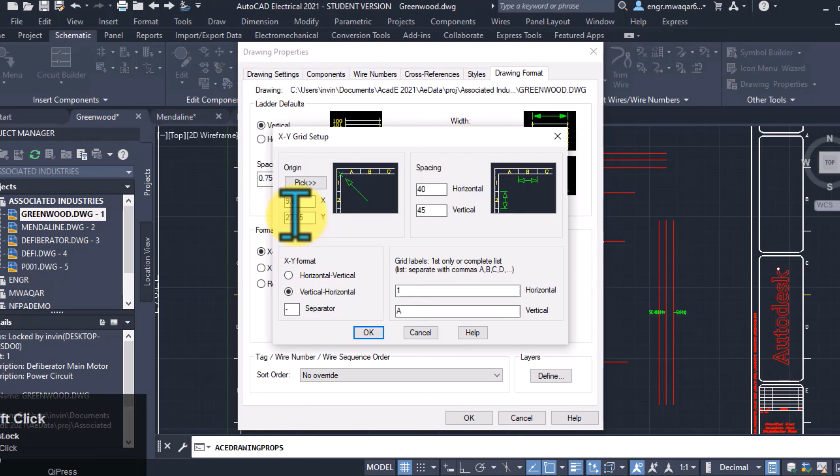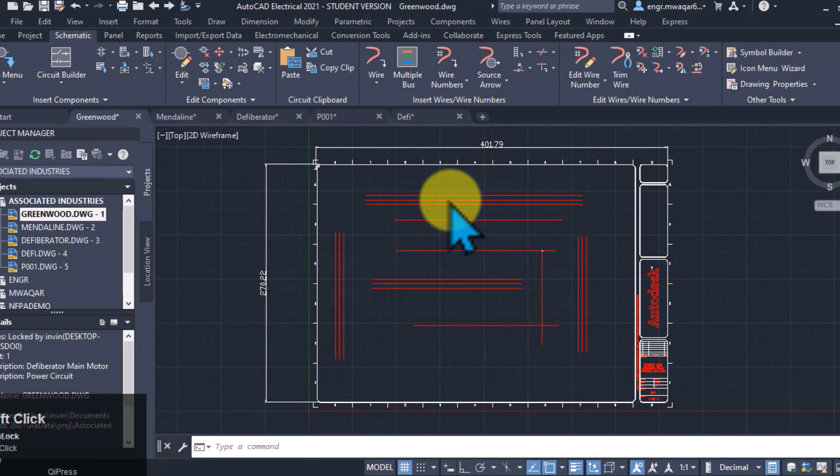Think of it like a master clock coordinating different time zones. Good analogy. The master clock sends out the pulse to update the time globally, but it allows New York to say it's 2 p.m. here and London to say it's 7 p.m. here. The local context is preserved despite the global command. But option 2 represents total centralized control. It is labeled sequential or consecutive drawing to drawing.

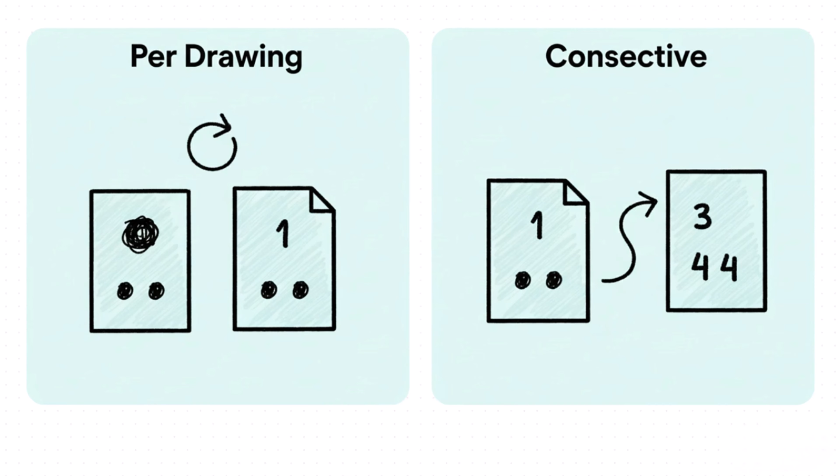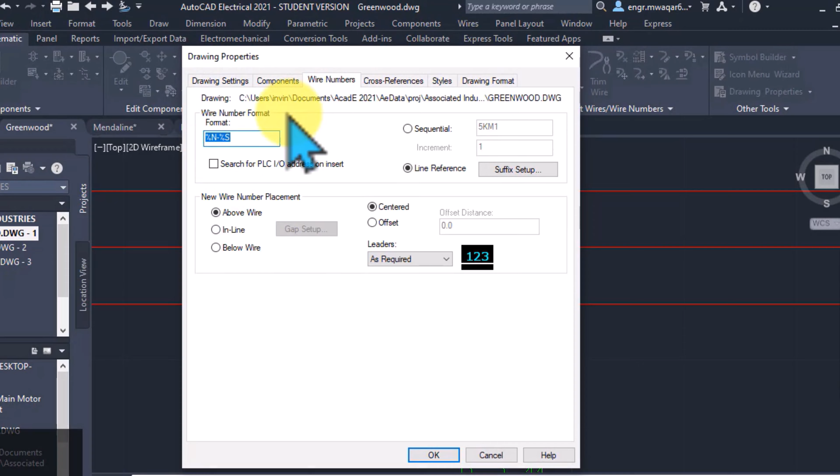When you select this, the software acts like a steamroller. It overrides and flattens all localized formatting rules and forces a single, unbroken numerical count across the entire span of the project. It mandates absolute global continuity at the expense of local nuance. The tutorial demonstrates this vividly. Drawing 1 gets assigned wires 1 through 4. The software closes the file, opens drawing 2, and picks up the exact integer count, assigning wires 6 through 25.

Marching right along. It sweeps into drawing 3, and the transcript notes it assigns 30 to 29, which indicates a slight counting overlap or reserve block in their specific setup, but it marches on. Drawing 4 gets 48 and 49. Drawing 5 gets 50 up to 55. It takes 5 disparate, disconnected documents and threads them together onto a single numerical string. The instructor highlights the primary allure of this method.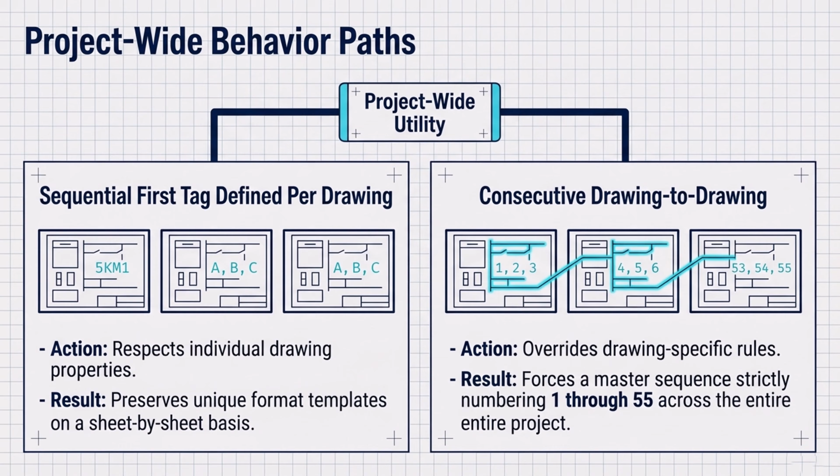By looking at the very last wire tag on the very last page of the project, you instantly possess a crucial piece of global data. The entire machine requires exactly 55 wires. You have a perfect, unbroken global sum. Which appeals immensely to project managers and procurement departments. Right, and that leads to my natural assumption when reading this.

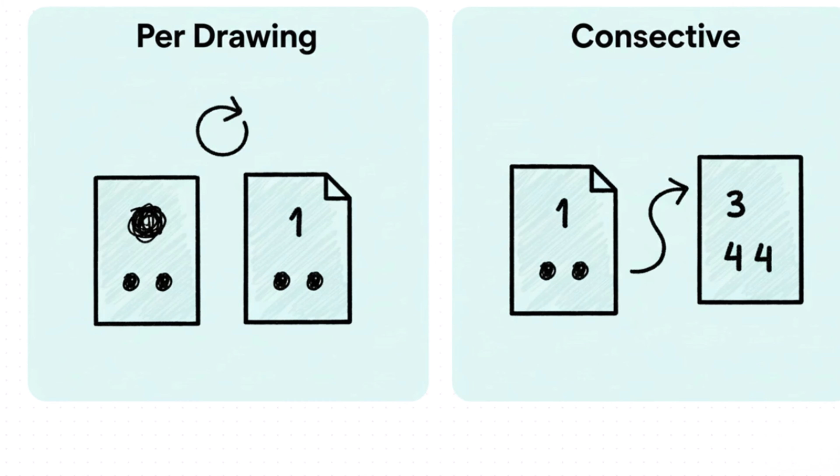If option 2 gives you absolute global continuity, ensures no numbers are ever duplicated across the entire project, it gives you a perfect final inventory. Why would anyone ever choose option 1? It seems like a no-brainer. Why tolerate the messy local rules when you can just steamroll everything into a clean, consecutive list? Because a clean list on a manager's spreadsheet is often utterly useless to the technician on the ground. Oh. This is the eternal conflict in data architecture.

Yes, consecutive numbering gives you a beautiful global total of 55, but scale that up. What if it's 55,000? Right. If you force consecutive numbering across 400 pages, the wires on page 312 are going to be named things like wire 42,817. Oh, wait, that's a big number. It is globally accurate, but it contains zero localized intelligence. It doesn't tell the technician what grid quadrant it lives in. It stripped away the 5KM prefix, so they don't know it belongs to the hydraulic subsystem.

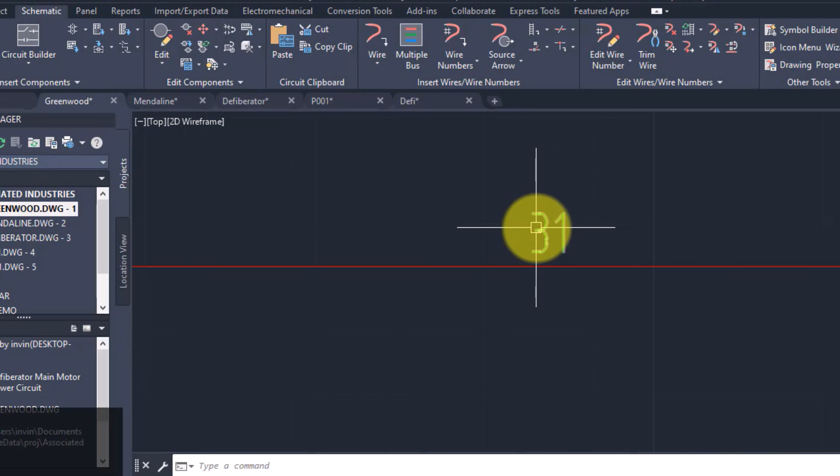Oh, no. It deleted the %S sheet reference. All the incredibly dense, context-rich metadata that the engineers carefully built into their local pages using option 1 is destroyed, entirely sacrificed to achieve a neat consecutive list. Wow. You are sacrificing functional context for the illusion of administrative order. Exactly. And the source provides a glaring visual example of what happens when you try to force macro-level automation onto localized files that aren't prepared for it.

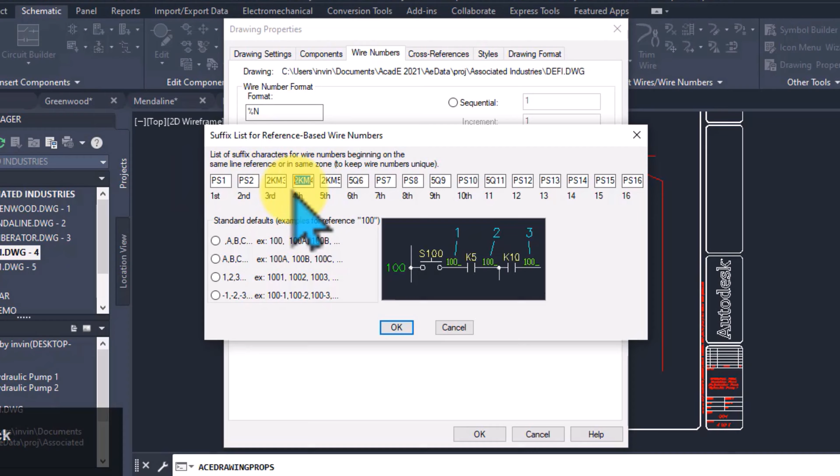They run the project-wide command, and they encounter what we can call the Frankenstein template problem. This visual was wild. The instructor applies the global numbering, opens one of the localized drawings, and the generated wire numbers are comically, absurdly huge. Like massive text.

A single number takes up half the screen, completely overshadowing the actual schematic lines. They open the next drawing, and the text might be microscopic. A complete breakdown of visual scale. The source explains exactly why this happens.

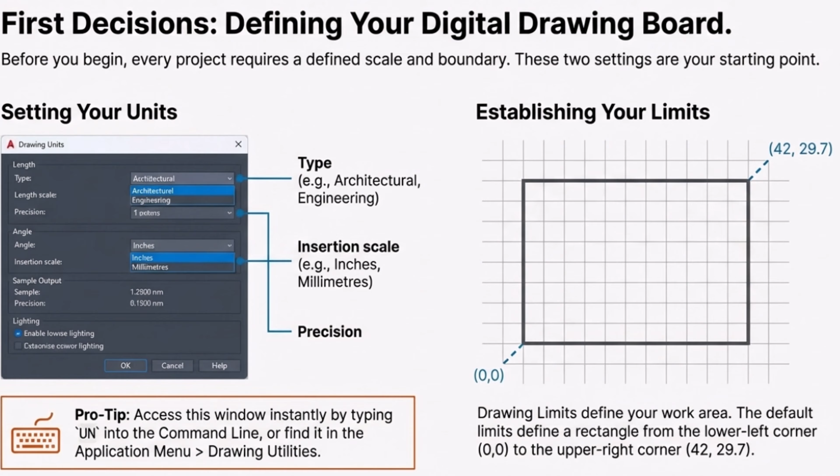The global algorithm applied the numbering process perfectly, but the individual drawing files within that project folder were built using fundamentally different foundational templates. Which is a huge problem. One drawing's environment was scaled in inches, another in millimeters. One had massive drawing limits, another was tightly constrained. They were fundamentally incompatible virtual environments sharing a single folder.

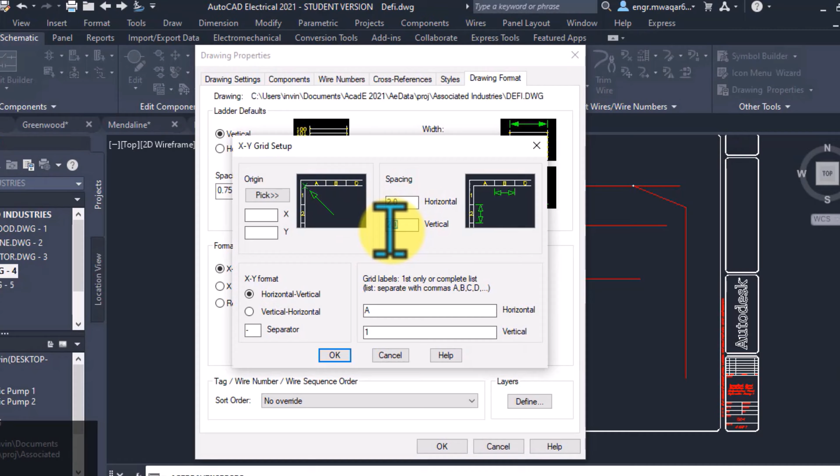Which provides the ultimate lesson in systems design. The giant text anomaly proves a harsh reality. Macro-level automation cannot fix micro-level disorganization. No. If your base templates, your units, your scales, your grid math are not rigorously standardized across every team member from day one, automating a process across them doesn't synthesize them. It just generates awkward, unusable, corrupted data much, much faster.

You cannot automate a bad foundation. The system will only amplify the flaws. If the templates are a mess, the software provides a global reset command. You go to Project Utilities, Add/Remove all wire numbers. Blowing it all down. You can wipe the entire project clean across all files, standardize your templates, and try again.

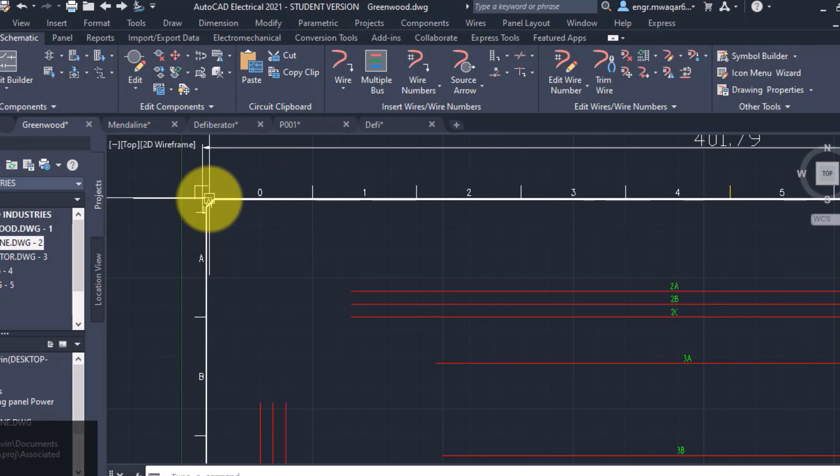We learned how a question mark is a sign of a healthy, honest system refusing to guess missing data, and how an uncalibrated origin point can destroy an entire grid. And we looked at the macro view. Finally, yes, we scaled those rules across multiple documents, discovering the dangers of flattening local context for global continuity.

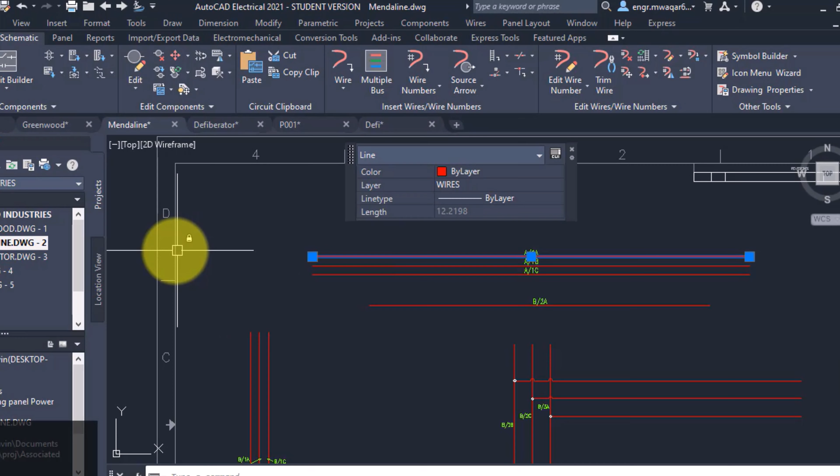It's a delicate balance. Whether you are configuring an industrial server architecture, organizing a corporate database, or literally drafting the electrical grid for a power plant, the philosophy remains identical. Establishing robust, standardized rules, locking your origin point, demanding rigorous syntax, utilizing uniform templates, these are not just tedious bureaucratic steps. No, they are the foundation. They are the defensive walls that keep the massive gravity of chaos at bay. Without syntax, you merely have lines on a page. With syntax, you have an intelligent system.

Beautifully said. But before we wrap up this deep dive, I want to circle back to a specific, almost throwaway detail from the troubleshooting section that completely changes how we should view this software. Oh, the intersecting lines. Yes. The source mentioned that if two separate digital lines cross and physically touch in the workspace, the software automatically, without prompting, assigns them a single identical wire number. Right. Because the algorithm recognizes that an intersection of two lines is no longer two distinct entities. It is a single, continuous electrical node.

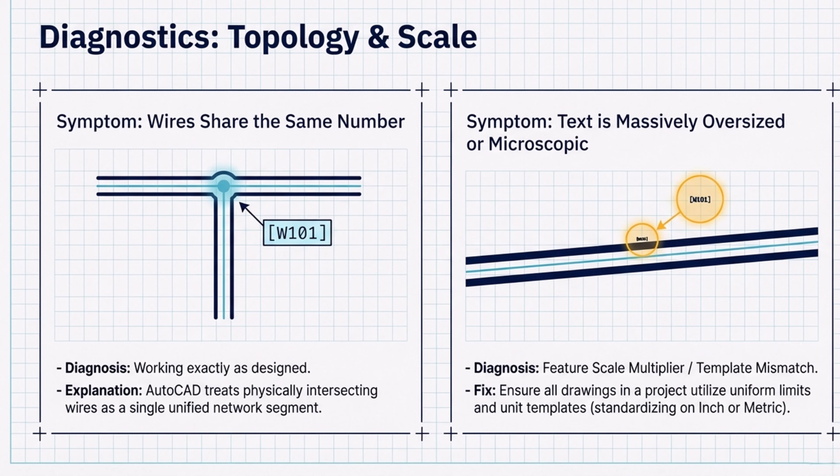When you really think about the implications of that, it is staggering. It means this CAD software is not just a digital pencil. Not at all. It isn't just plotting inert vector graphics onto a digital canvas. The software possesses an automated, inherent understanding of the physical laws of electricity. Yes. It knows that if two copper wires make contact in the real world, the electrical current merges. The voltage equalizes. They are no longer two paths. Physics dictates they are one path.

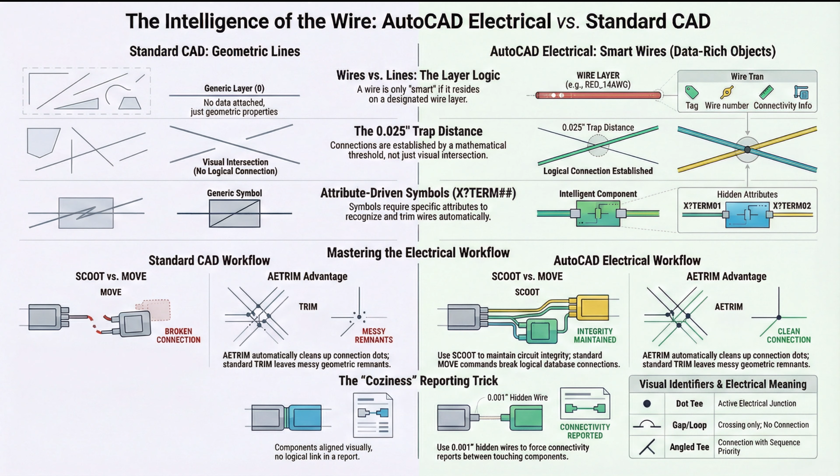The system is simulating the laws of physics, not just recording geometry. Exactly. The software refuses to let you label a physically connected circuit as two separate wires because it knows that labeling would violate the physical laws of electrical conductivity. Yeah. It won't let you build an impossible machine.

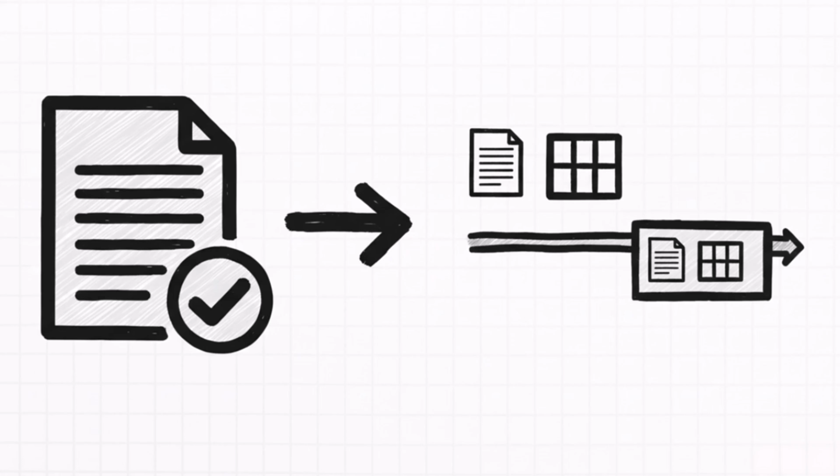That's incredible. So here's the thought I want to leave you to ponder. If our digital drafting tools now inherently understand the actual physics of what they're drawing, if they're actively preventing us from making mistakes that violate the laws of nature, at what point does the digital tool stop being a passive canvas? That's a great question. At what point does the software stop being the paper and start acting as an active autonomous co-engineer, constantly looking over your shoulder and correcting your math in real time?

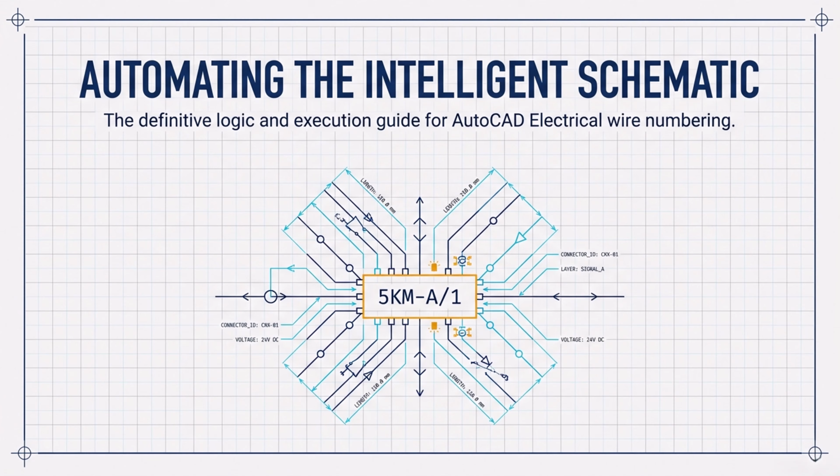Yeah. When the system knows more about the physical world than the person drawing the lines, who is really designing the machine? It really makes you wonder. It's something to think about the next time you drop a line onto a grid.